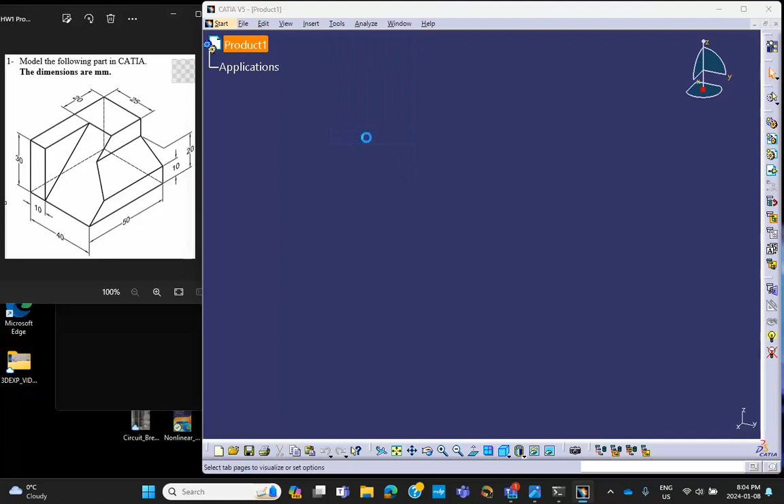units are in millimeter. So tools, options, under the parameters and measures, units. Right now it's inches, so I'm going to change that thing to millimeter, and that's good. And then also the sizes that are involved are about 50, 40 millimeters. So why don't I make those grid spacings in the sketcher, let's say 10 millimeters each, okay?

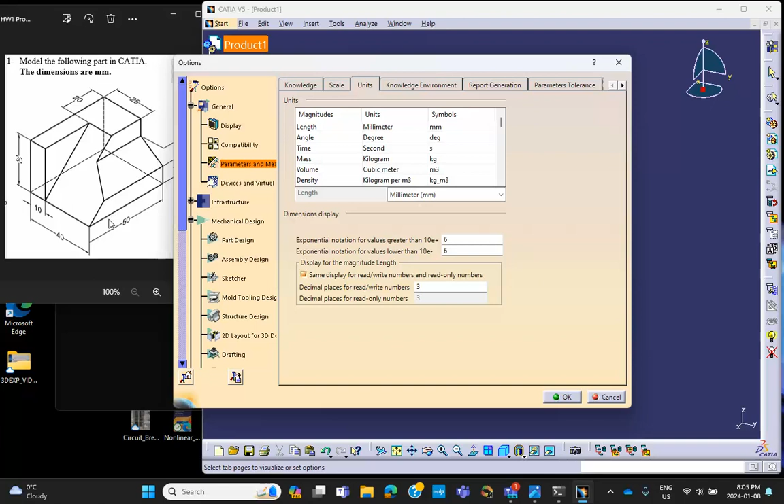So I go to mechanical design, the sketcher, and for grid spacing, I'm going to make it 10. That's convenient. Oops, 10. And the graduation is also 10. Okay. I'm going to close this because I want to start in a part file. Part. And I'm going to call this thing homework one.

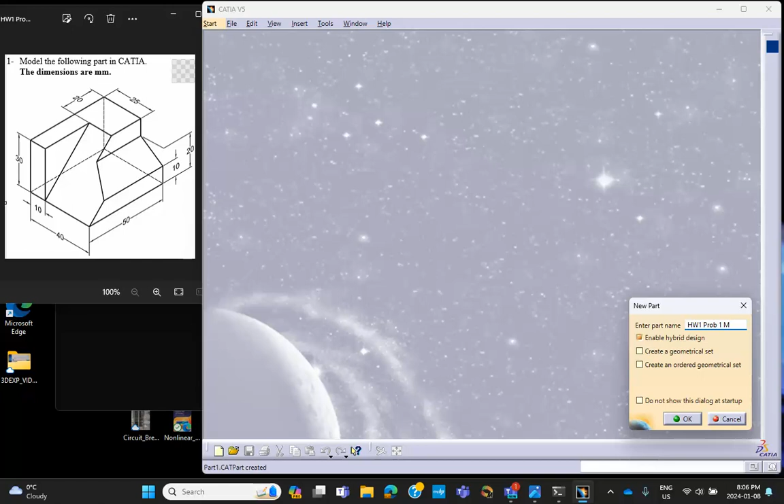Homework one. Where is this? Okay. Oh, yeah. Okay. Part name homework one. Problem one. And this is the mech design. Mech design. All right. So we say okay.

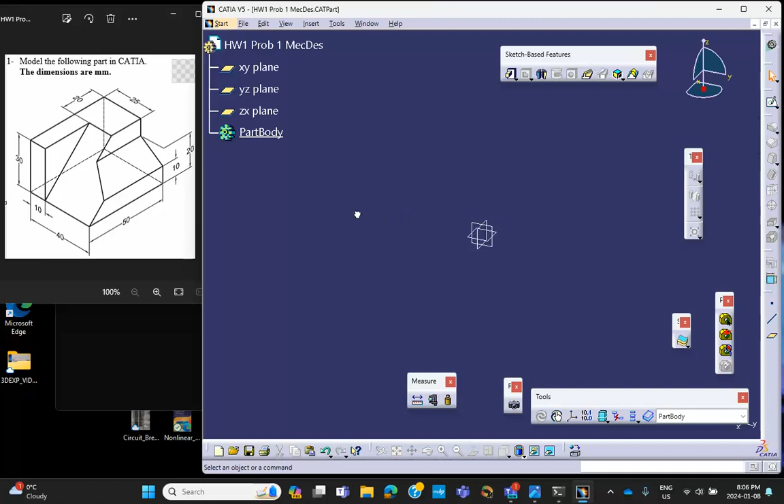And immediately I'm going to save this thing, file, save management, save as. Now I have a folder called for mechanisms right here. Yep, that's good. Problem one, mechanism design. That's good. It's going to go there. All right. So on a convenient plane, on that horizontal plane, I will sketch a rectangle that's 50 by 40.

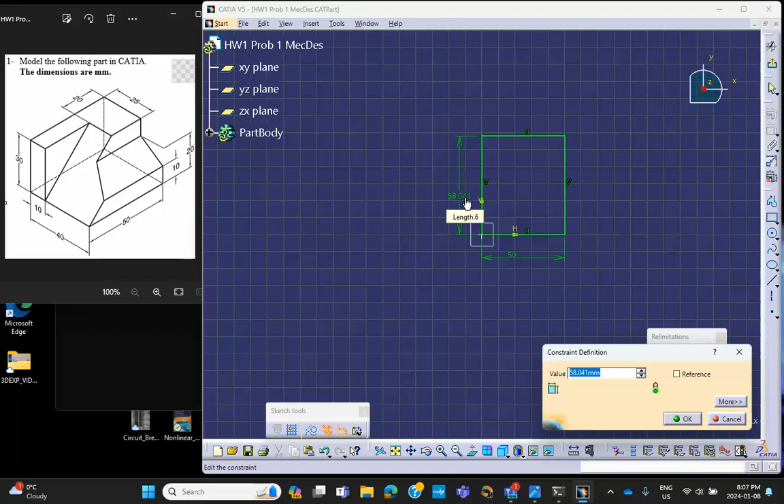So here's the 50. And this is going to be the 40. Okay. Exit. And pad it up by 30 millimeters. All right. The next thing I'm going to do, I'm going to take a rectangular cutout, triangular cutout here. So what do I mean by that? On that side,

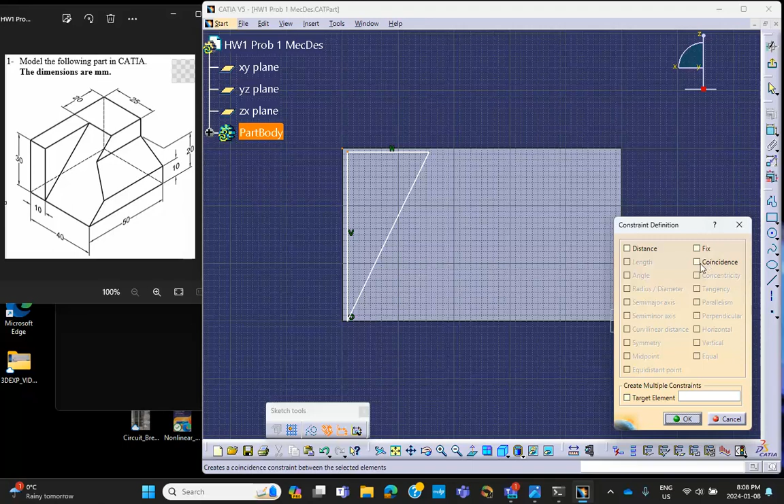I will sketch. All right, and probably the easiest way of doing this thing is drawing a kind of a triangle here. Let's see, all the way down, all the way here. But I want to make this point coincident with that point. So this point, control that point, we make it coincident. All right. And let's give some dimension. Now that dimension is 20. So why don't I make a dimension from here, for example, to there, make that thing 20.

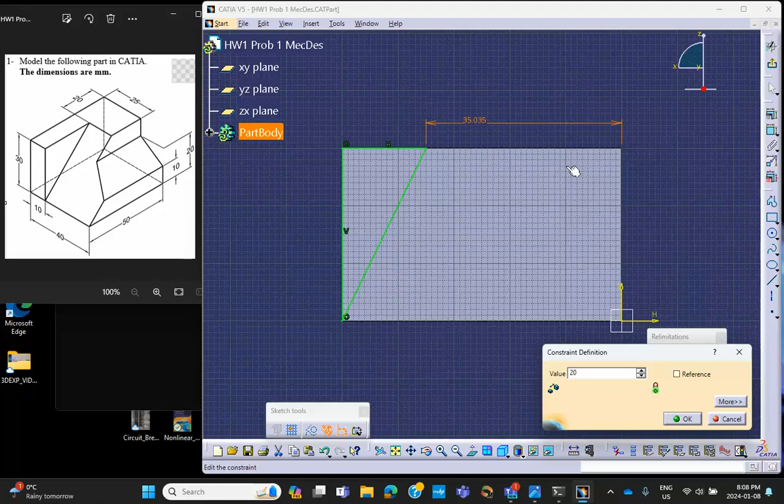Say fine. Exit. And we make a pocket of a depth of 30. So pocket, 30 millimeter. Okay, so that looks good. So that's what you see over there. The next thing I'm going to do, that cutout here, I'm going to draw something on the back face and then make another pocket. So turn it around.

On this back face, I am going to draw something like this. Let me see. If you look at the back face, let's see now. Basically, I have to draw something like that. See? Yeah. And then make a cutout. The dimensions I'm going to worry about later on, right? Right now, I'm not worried about dimensions. So let me enter the sketcher.

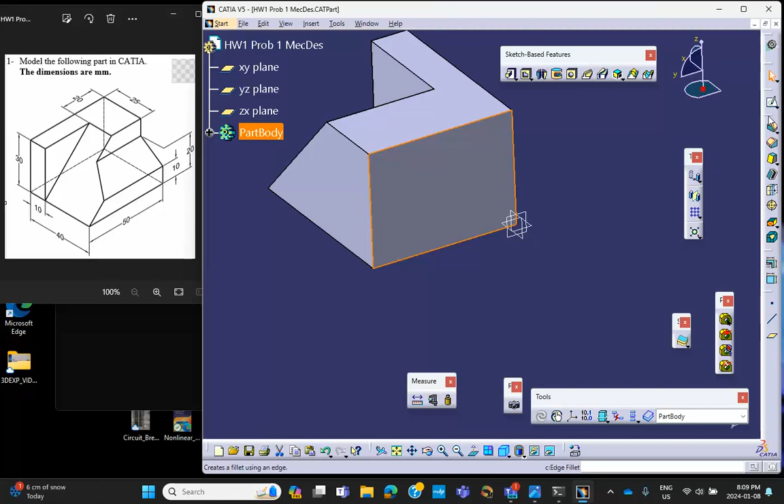Okay, so I will draw something to this effect. Let me see for a second. Yep. So maybe, and if it doesn't look right, we're going to come back and fix it. All right. So this point, I'm going to make it coincident with that point. Control, point, coincident. Very good. Let's give it some dimension.

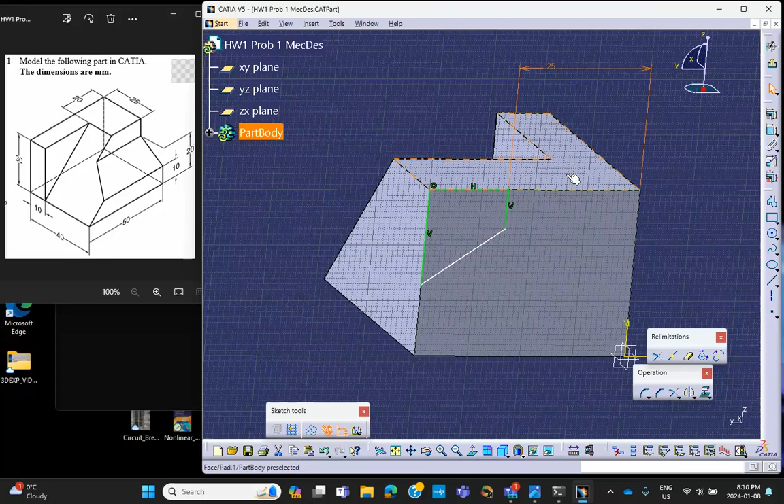Obviously, this dimension seems to be 25. So I'm going to dimension from here to there, 25. All right. And this dimension from here to here is going to be 10. This is going to be 10. All right. And exit. We're going to see if this is going to come out to be the thing that I want.

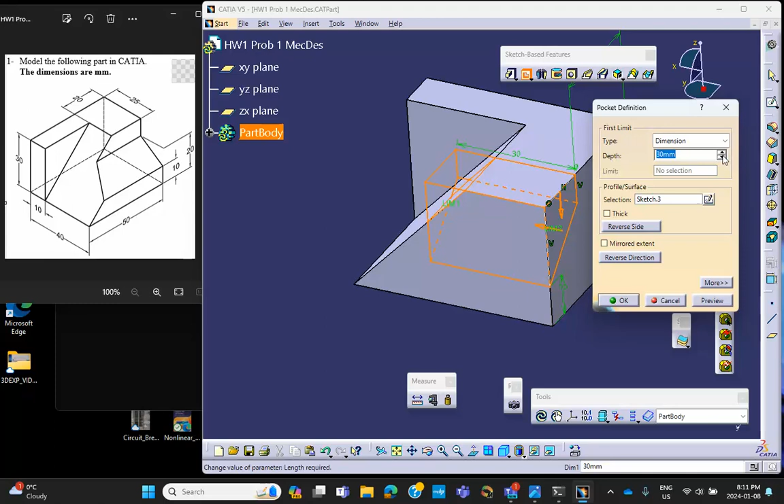Pocket. Pocket. Keep going. More than 30. Let's see. Yeah, came out to be good. And there's so many other ways of doing the same thing. So let me save this thing and stop the video.